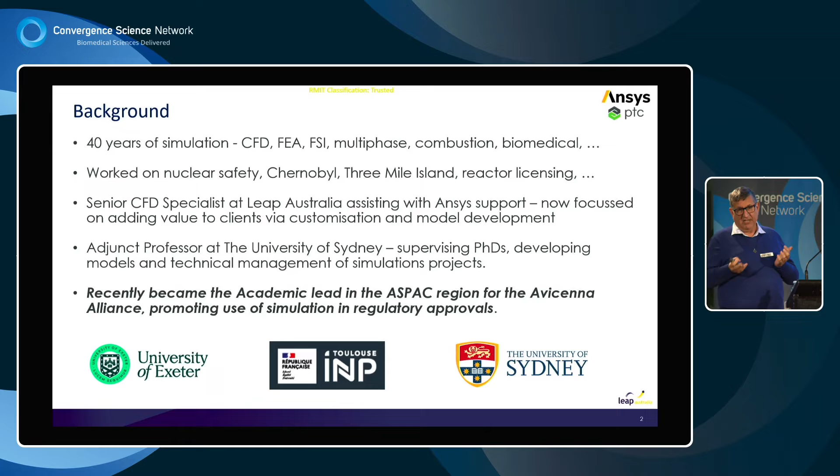I've been working with the LEAP team here for 20 plus years, doing simulation and supporting simulation. And I'm an adjunct professor at Sydney Uni in chemical engineering, where I have students, research projects, my own projects. So I'm actually very hands-on with software, and I think that's important. If you're going to be using this stuff, you need hands-on experience because you'll then realize the pros and cons of what you can do with software.

And recently, I've joined as an academic lead for ASPAC in the Avicenna Alliance. Their specific objective is connecting with regulators and helping make simulation more palatable to regulators by showing how it can be used to reduce development times, etc. And that's some of the things I want to talk about tonight.

So here's just a few examples of the types of simulation you might see. So when we talk about the medical industry, we've got to think about top left there. We've got tablet coating and tablet manufacture. We've got treatment of a cancer in a leg where we're using electromagnetic waves here, and so we need to be able to model things like that.

A drug being delivered to an eye and how it spreads, but that could be anywhere. A chromatography device being modeled to look at separation of chemicals, and then from that know what compounds are in them. And then deployment of a stent. I think this is one of the areas where everybody knows somebody who's had a stent put in, and how amazing that technology is. A small cut in an artery or a vein, slide a stent in, open it up, and re-establish the blood flow.

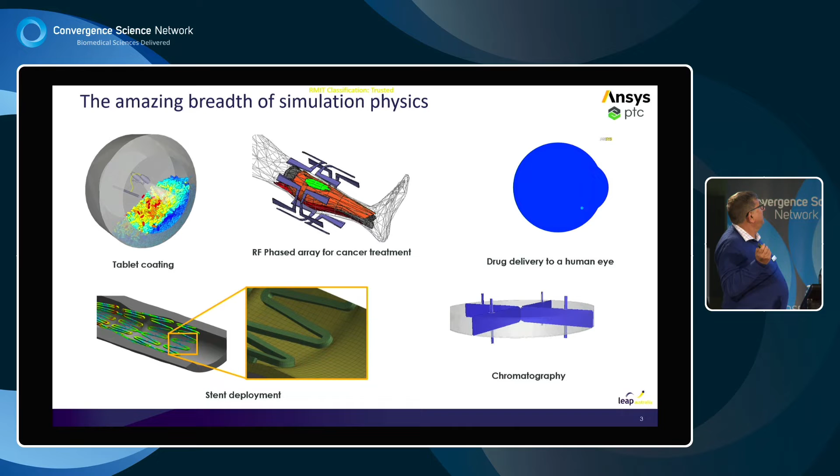Oops, I'll get the hang of this. So, what are we going to cover today? We are going to cover exactly why does healthcare need to innovate, and how is it going to do that, introduce digital twins, and what are some of the examples of how you construct models to go into digital twins.

So this example on the left-hand side may seem a little strange. Those are bioreactors. But if you think about it, most drugs have to be manufactured at large scale. Vitamin supplements, etc., need to be manufactured at large scale. And what you find is industry is very conservative, so they typically use mixing tanks and that. But this was a project where we looked at, okay, there's a much cheaper technology maybe in bubble columns that could help with manufacture. And so there's a very wide spectrum of simulation that goes into the healthcare and the biomedical industry.

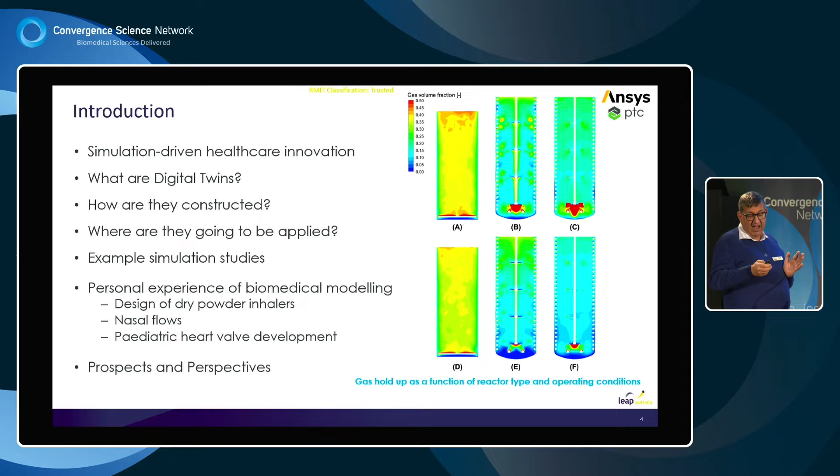What do we need to do? Why do we need some of this change of innovation? Well, if you look at the amount of money in healthcare, it's just rising dramatically. Procedures are getting more and more expensive. Equipment is becoming more expensive because you're able to get much more detailed scans. You can treat diseases and things that you couldn't treat a while back. So it's a very expensive industry.

Everything that's used in a medical industry has to be approved. And that approval can be very much sped up if you can use simulation. If you look in external industry, simulation is a core part of anything you do. It needs to progress much deeper and faster into the biomedical scene. And that will bring us back to some ideas around the quality.

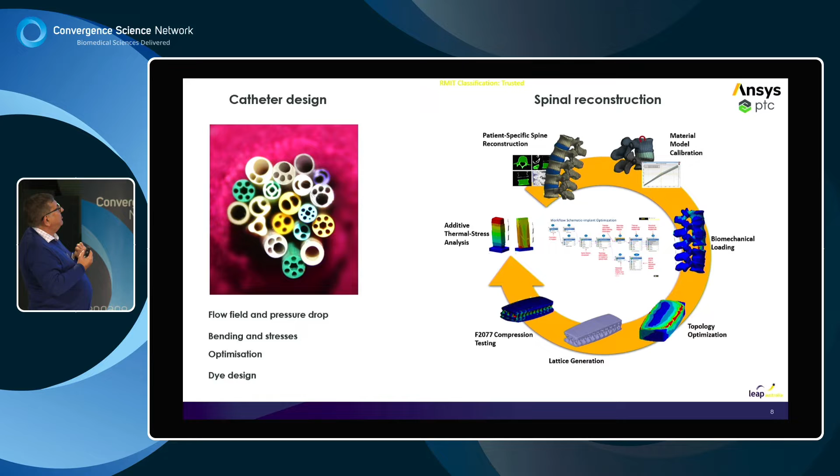Then you could do some topology optimization. Then you could say, okay, this is the topology I need, but let's make it a lattice so it's strong but doesn't have excessive weight and material. Now you've got to pass some standards, and F2077 is a compression testing standard that you have to pass, so you can do that in simulation. And then you can go and look at the manufacturing of that and what thermal stresses might do to it. And you've done all this simulation to make sure that the part you're going to insert has passed all sorts of tests and is as optimal as you can make it.

So, that's another part of simulation, is doing optimization, trying to make it as good as you can. Obviously, with a spine there, you can't just have a stack of spine parts and pick one off the shelf and put it in. These need to be customized.

So, every part of the healthcare process can benefit from digital modeling. So, drug manufacturing we've already talked about, drug delivery equipment, whether it be inhalers, whether it be pumps, whether it be sprays to the nose, implantable devices. So whether you implant a heart valve or some sort of orthopedic implant. And then also, there's a ton of equipment in hospitals that needs to be modeled and monitored.

And so, it's down through a whole load of different applications, from pharma to medical technology to in vitro testing, using simulation to design the best in vitro tests that you can and understanding what their limitations and strengths are.

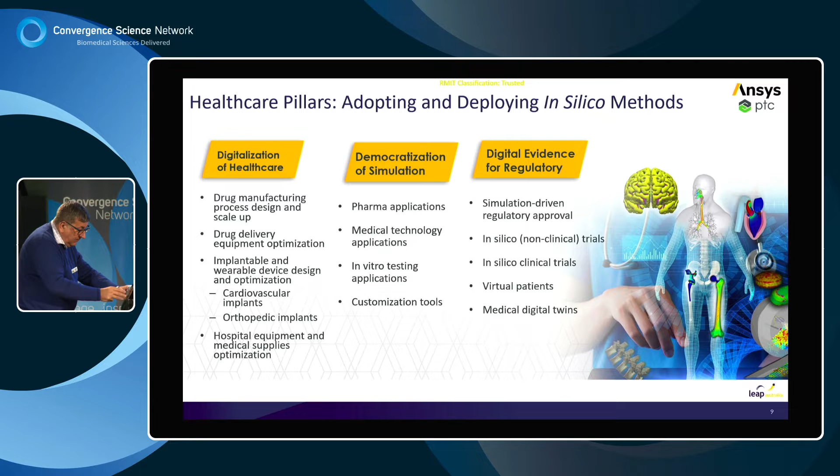I was involved with some work recently where there was a section of the gut with peristaltic flow, and somebody was making an apparatus to do that, and we could simulate that with fluid structure interaction and tell them a lot more about it, and we could tell them whether the material they were going to use would survive repeated use or not. So there's a big synergy. Just because somebody's doing experimental work doesn't mean they won't benefit from simulation.

And then there's getting towards the regulatory. So the US and Europe are moving very fast to have simulation evidence recognized for regulation.

Excuse me, it's hot in here.

That's something that Australia is starting to talk about, and people from Australia, from the TGA, are going out to these meetings, and it's going to happen here too. And so those of us doing simulation need to be in a position to provide the guidance and leadership that's needed there. And that's one of our things. I think the senior simulation people have got a huge obligation to bring on a generation of good simulation people to be able to take this task on.

So if we start with the process here, so if we start at 6 o'clock, we want to start some simulations. We have to manage the simulation, the data. We might then need to reduce that to a simple reduced order model, because some of the simulations might take days to run. Obviously, that's no use for making quick decisions, but you can capture that data in a reduced order model. You want to be able to employ those to help with regulatory compliance.

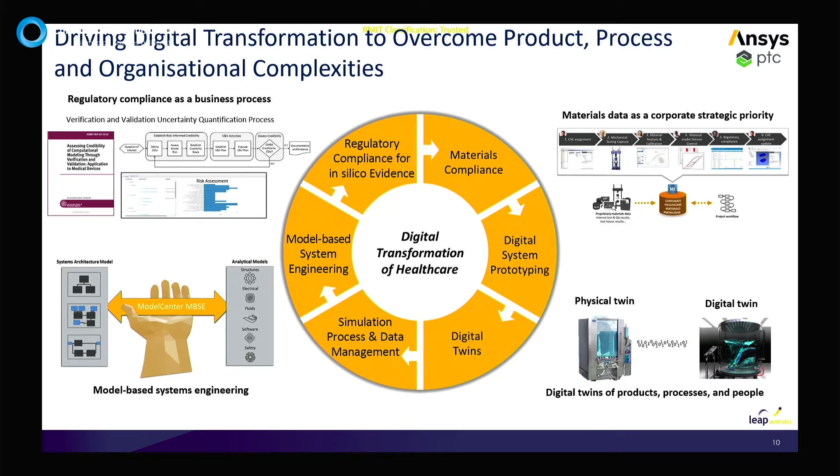So you might have, like here in the bottom right, a physical twin and a digital twin. So it might be some sort of reactor. It might be a computer model of that, and they're talking to each other. We definitely have to be able to go from very detailed simulations of structures, fluids, electromagnetics, to much simpler models that can be built into digital twins. You can't have a digital twin that runs a fluid structure interaction every time it wants to ask a question or answer a question, because it's just too costly.

And then there's this whole question of verification and validation. If we don't have verified, validated models, no regulatory organization is going to want to touch them. And nobody working in this area wants to be making decisions about somebody's health without having a proper, validated, verified model, and in all conscience believing they've done the very best to advise.

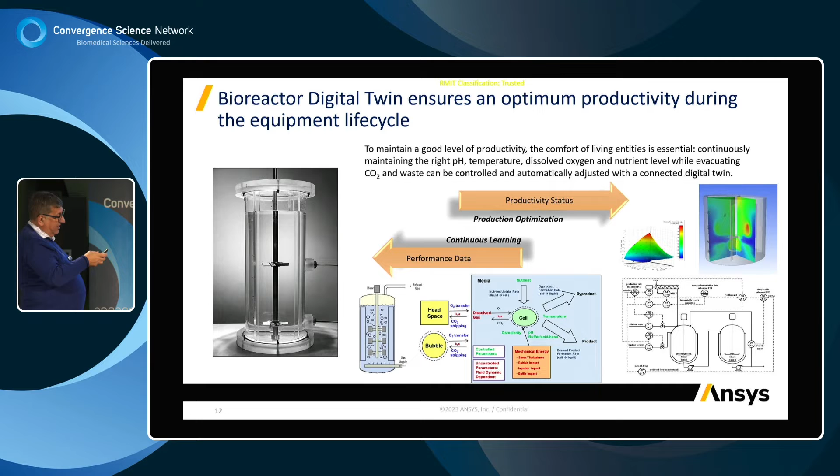And this way you can improve performance. So you don't have to improve the conditions in these by much to suddenly get a 5% yield improvement, say. And that's massive dollars, massive product enhancement. So having a properly controlled modeled system here can actually be hugely beneficial for productivity and the stability of the system.

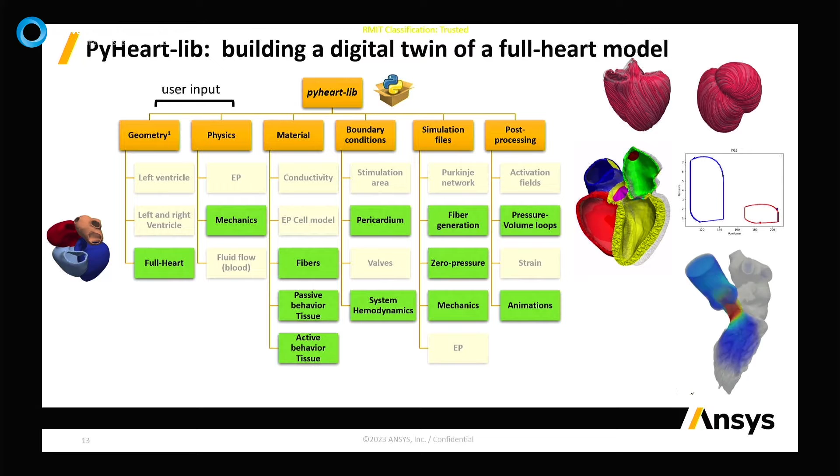So this is a project that's going on at ANSYS in Lyon, in France, which is mind-blowing. They are making a Python-based heart model where they want to include all the physics. So there's some green areas where there's good progress. There's some yellow areas where there's work still going on to do. But they want to have the flow, the mechanical behavior, the electrical behavior, a pacemaker there, and be able to model all of this stuff.

They now have a strategy for taking scan data and getting it to a geometry in about 20 minutes with very good techniques to clean scan data and extract geometry. So you can imagine that this type of tool is going to just get better and better with time and computing resources.

This is work from Oklahoma State University on entry into the lungs. So they've got computational fluid-particle dynamics, so small particles that you want to get to the lungs. You've got the motion of the lungs there. Now, you cannot model in any sort of simulation all the way down to the alveolar, because the number of kilometers, if you like, of tubing is going to be crazy if you do that.

So you might use detailed simulations, say down to generation 13, and then simple network models beyond that, and have a system that you can really make quantitative. So this is towards having a digital twin based on scans. You can obviously do scans of all the throat and the nasal there, with appropriate models.

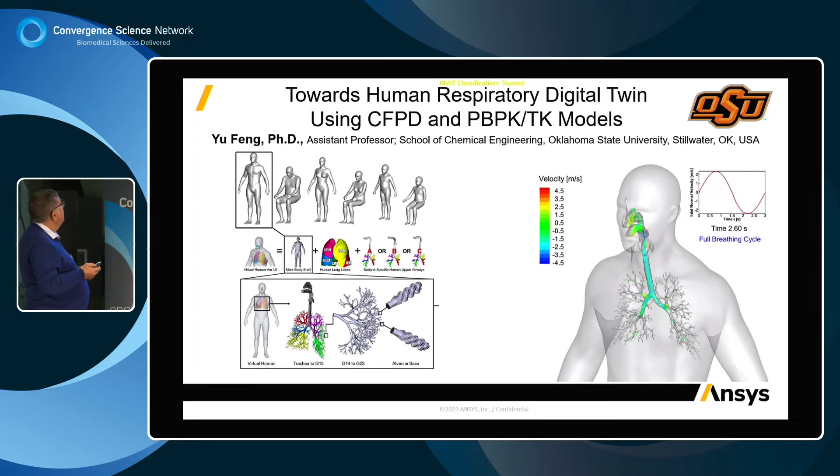So, this is the slide to hurt you all, to punish you for not being mathematicians like me. But there's a serious point to it.

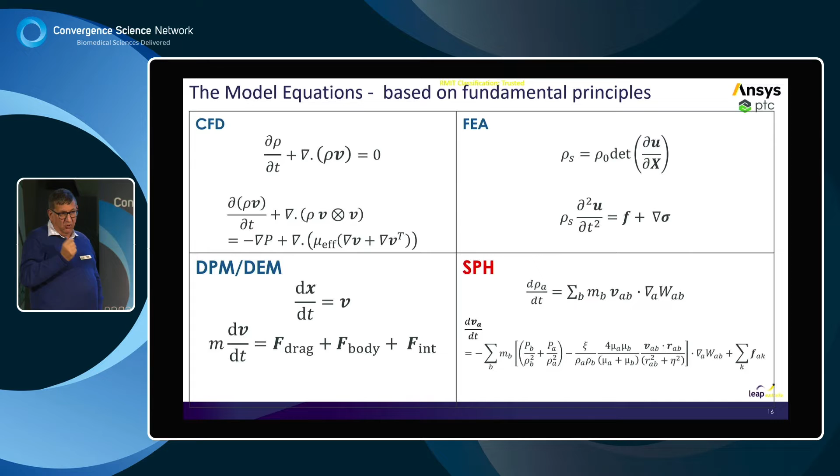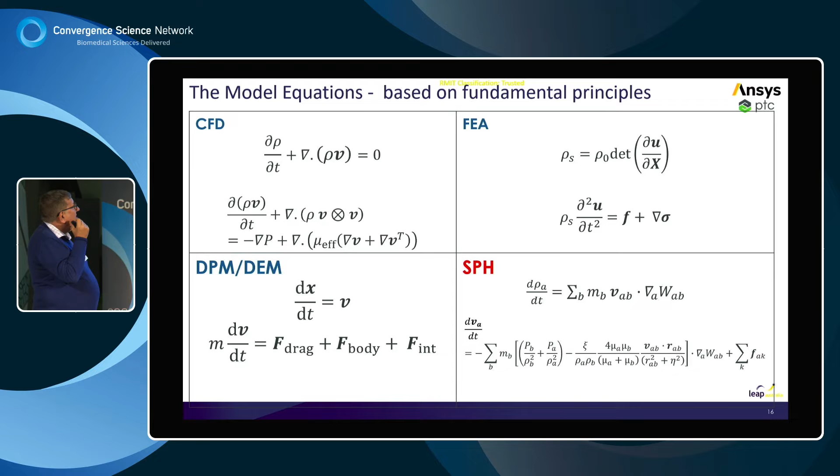So, digital twins are based on well-known physics. And so it's really important to understand, whether it be fluids, structures, particle motion, there are fundamental equations that are solved, which are laws that you can't meddle with. They are the law for doing that. And so, provided you solve them properly and you put in the right constitutive laws, you can actually be sure you're going to get out the right answer.

So obviously, if we take finite element analysis, if I put in the wrong material properties, I get the wrong answer. But the equations that I'm putting in are actually correct. So you kind of shift the burden to not having to prove the fundamental laws, but having to use them correctly.

And then there's one odd one out here, because I want you to be able to distinguish: some people do modeling with a process called smoothed particle hydrodynamics, where you treat a fluid like a collection of particles, and it can be a very efficient method. But what you've got to understand is that's not a fundamental law, that's an approximation. And so it's really, really important in modeling to understand what is true, what is an assumption, and what is a constitutive law that has to be used to close a model.

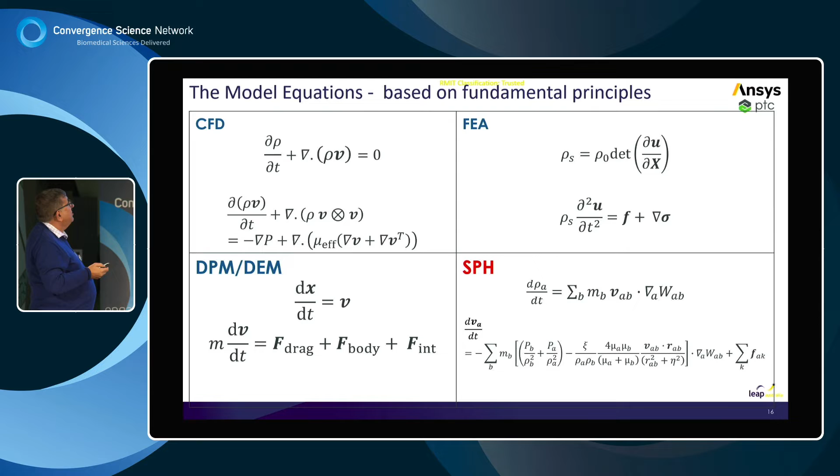So I was recently asked to write a review for the chemical process industry for its centennial there. And they asked me to specifically say, what's the future of simulation in computational fluid dynamics in this industry? And I wanted to do some key points here.

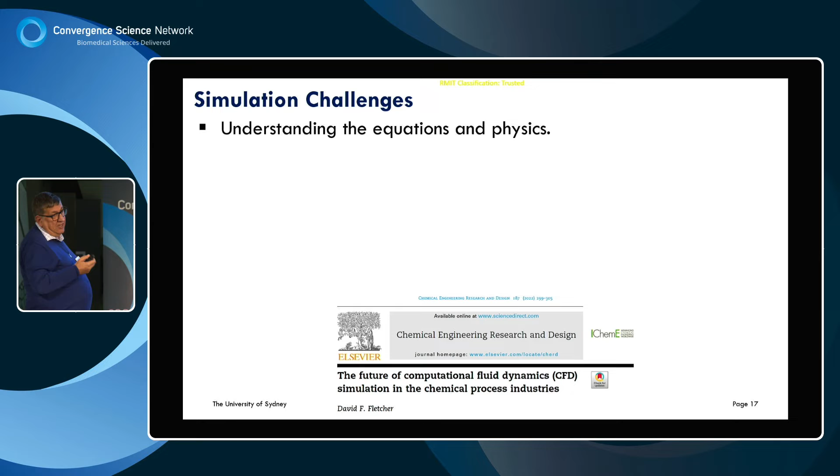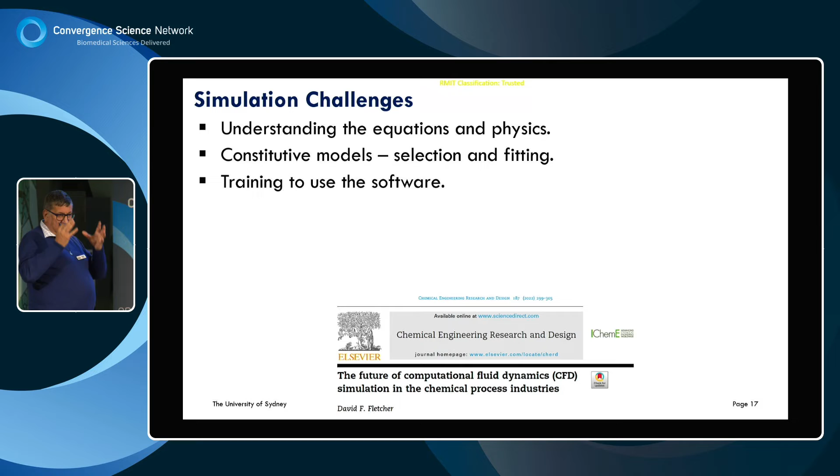If you're going to use software, you've got to be properly trained. You need to understand the basics. You also need to know how to use the tools. And when you've got a model, it's not good enough to just say, I've got pictures. You've got to validate and verify. So verify is to check maybe against analytic solutions, against common sense. Validation is to compare with experiment.

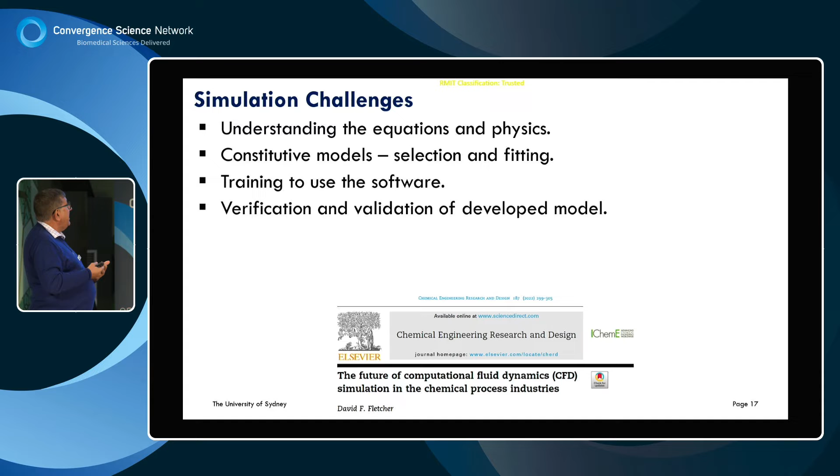And we have to keep in mind experiments aren't perfect either. When I see a simulation that goes through every dot of experimental data, I know it's made up, okay? Because you're never able to do that. It's really important that you keep these things in mind.

And I'm going to tell you that there were too few PhD-trained computational engineers out there. And that's just a fact. If you talk to people in industry, there are not enough people. There are loads of people who've done some simulation, but they're not computational engineers. They don't understand what their simulation is doing.

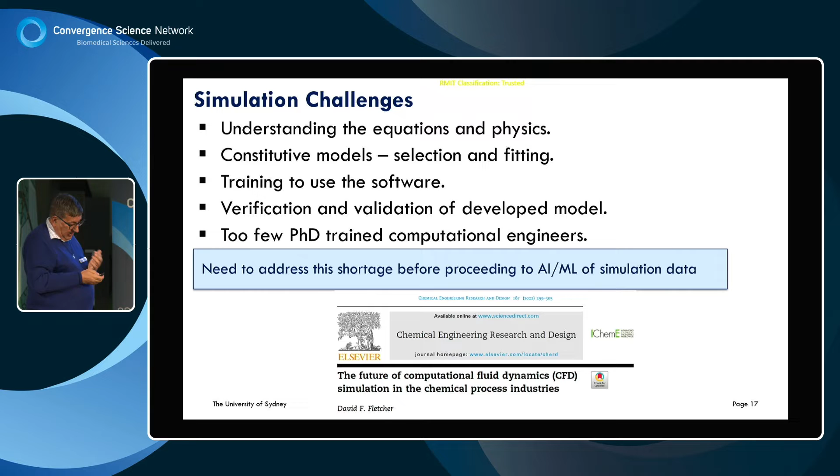And now we need to understand this as we go towards AI and machine learning. What are we going to cover up with that? So this shortage needs to be addressed, and those engineers also need to know how to interface with AI and machine learning. It's really important, I think, this point about what we need from our universities. I'm now going to give a few examples.

So this is some work done with the CSIRO here in Melbourne, and it's about stomach modelling. So I do need to just get a couple of these movies going. Now, I don't know whether I dare click. But let me talk about, maybe we'll just see this one. So this was a theoretical-like experiment where you put some oil in the stomach, you put some water on top, and you looked at how density inversion occurs in the stomach, and understanding how that interacts with the shape.

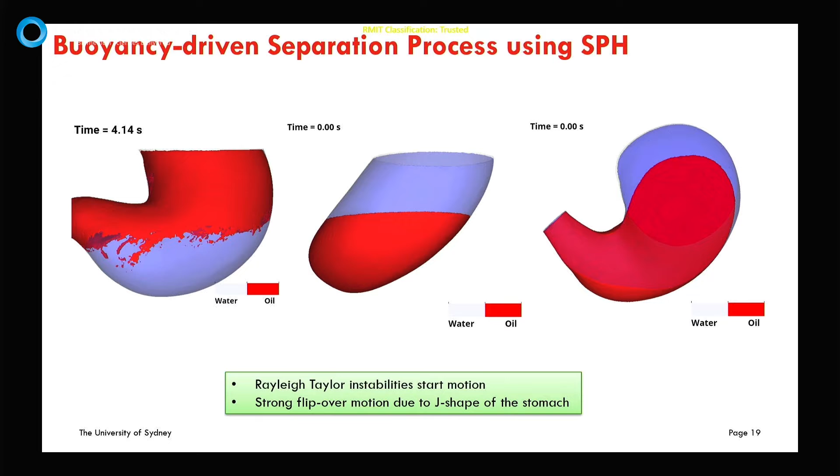Why do we care about these things? We care about it because of obesity and stomach problems. How is food in there and digested? But also, what happens when you put medications in the stomach? So this was like a bit of a starting job to look at that flow. And because you can do this process with a number of different techniques, it's a great validation because you can compare techniques. Now, I'm going to skip over those.

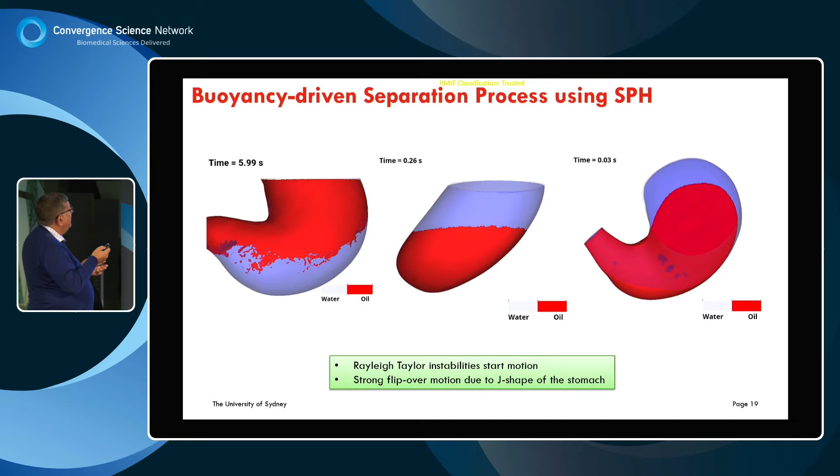Come on. I don't want to see them all. Yeah, so this is, let me go back one. Let me just go back and then forward again.

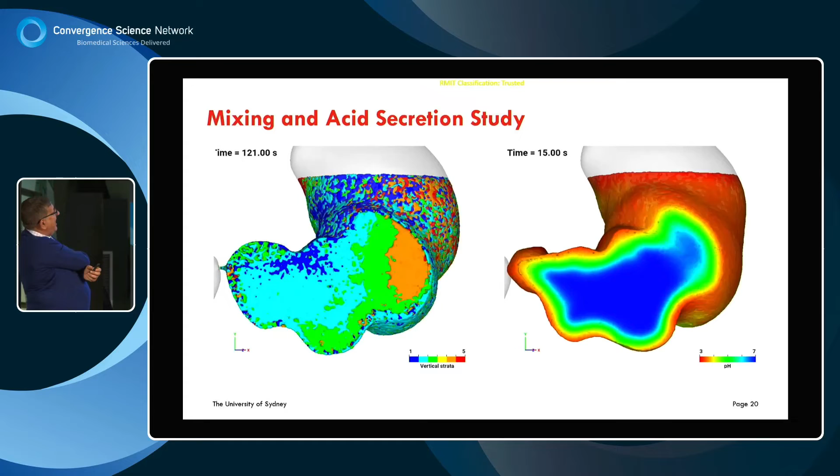So we started off with layers of coloured particles and looked at how they mix in the stomach when you've got the contraction waves. And then looked at how acid moves into the stomach. Now the question is, how important is that contraction wave? So let's go and have a look. Let's do a simulation with a static wall and with a moving wall.

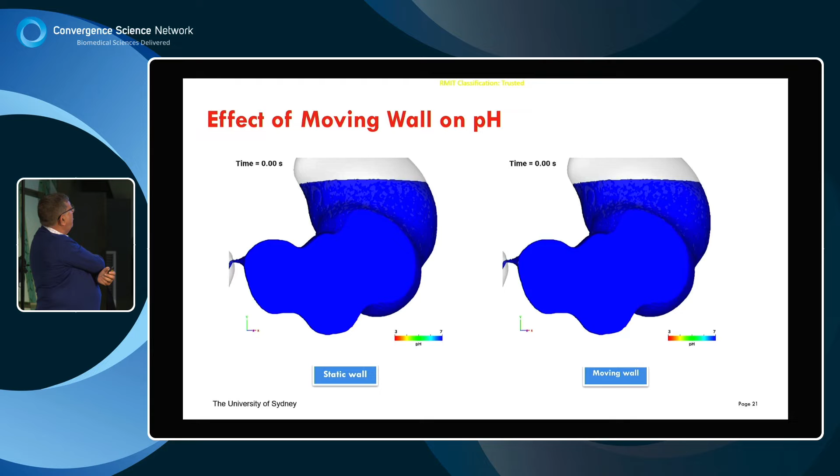So that's the other thing about simulations. You can do what-ifs. So if somebody's got a set of contraction waves that are abnormal, you can set up a simulation and start looking, how is their stomach functioning? How is the mixing going? How is the acid being introduced? So these are your steps that you need to build a digital twin.

I've got a couple of slides on inhalation devices.

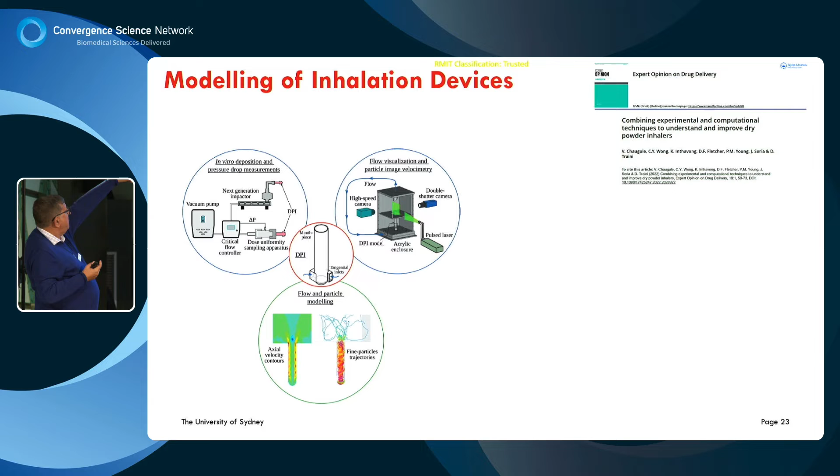Often your validation cannot be directly inside a device. So if you think of that lower part, like a test tube, that's inside an inhaler, which has got a couple of swirlers on it, you can't actually measure the flow in there with a laser sheet, but you can measure what comes out.

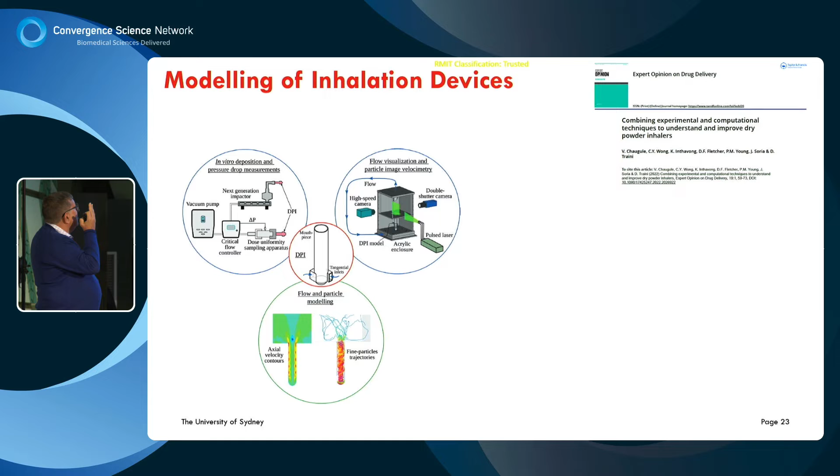So good quality experiment and simulation go hand in hand. Anybody who tells you experiment is redundant is completely wrong. You need high quality experiment to validate simulation, and then simulation can tell you what's going on inside. It's not a bad assumption that if you could predict the way the jet behaves outside, you've likely got it right inside. So that's kind of important.

A couple of bits of simulation with my colleague Kiao, who I work together with. This is just to say what you can do now in terms of looking at things like spray breakup, looking at the complex flow in the throat, and understanding where the flow is smooth, where it's turbulent. You can do very high-level simulations that can help you understand the components of anything you're making. So if you're making a spray, you can understand how it's going to break up into certain droplets and what the shape of the chamber is going to do to that.

Let's just check for time. How am I going? 6:39, that's good.

High quality simulation again is really important here, and that information can start to be used to form a digital twin. So our last major topic is around hearts, and this is a project I'm super passionate about. It's about developing a polymeric heart valve replacement for children.

The key thing here is if a child is born with a heart defect, they may have to have 5 valve replacements between being aged 3 to 23. Can you imagine your child having 5 lots of surgery, maybe 3 of that open heart, and every time, of course, there's a risk they'll die?

Why do they need that? Because the arteries are growing, and the valve has to be replaced because it doesn't grow with them. And of course, if the valve stops functioning, there's no oxygen, and that's catastrophic.

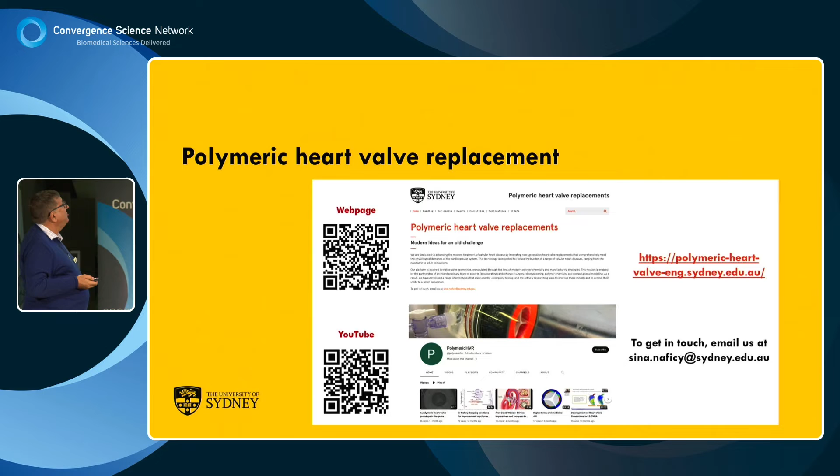So I'm working on a project where we've got a pretty strong team that we've put together here. I want to talk to you about some of the simulation work going into that. It's a very young team, the average age here is pretty low.

Key in this is the second person, Professor David Winlaw, who was the surgeon with the passion to do this. He came and sought out a couple of us, my colleague Fariba, because she was into biomaterials, and then very quickly they realized that simulation was going to be key, and that's how I got into it.

So we've built up this team. COVID hit just as we started all this project, so we kept the team together through COVID. One of the things I did was democratize simulation - get the experimentalists involved with simulation, even though they weren't going to do it themselves, but to see what we could do. The simulation team worked super hard and involved lots of people in simulations, so that when they went back to doing their work, they understood the sort of needs we've got.

Luke from Leap, a colleague from here, has been instrumental in working with us on this - give him a plug. So when you're getting into a project like this, you've got an end goal. You want a really detailed model of this valve, all the materials problems sorted, all the surface coating problems sorted, and everything. But you can't have that - you've got to go step by step.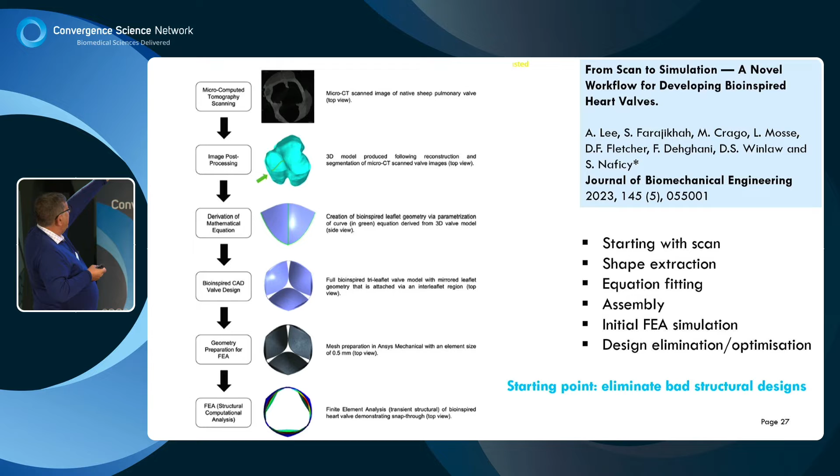Our first step was to take scans of, I think this was a sheep's valve, extract from it some of the essential geometry, fit a mathematical equation to it, build a valve, and do FEA. So take a typical pressure load on it. Can we open these properly? Can they snap through or not with the sorts of materials we want to use? That was the very first step.

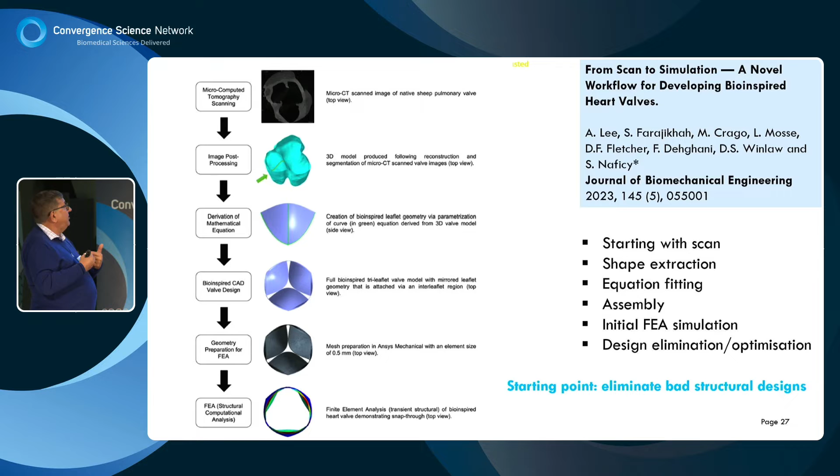So why do you do simple things first? Because you can throw out certain designs very quickly. It's like if you were designing some piece of equipment - get rid of the bad ideas very quickly, then only bring more sophisticated ideas onto good candidates.

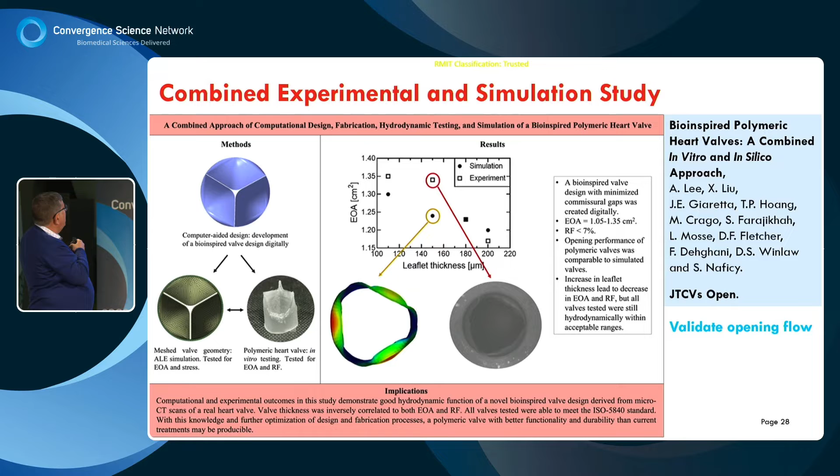So the next step was to start putting fluids in this. We've got a pulse duplicator, which allows us to measure the flow through and record it. You can see you start to get this effective orifice area when it's open. Those look quite different between the simulation and the measured, but actually it's the scale - there's 1.22 to 1.32. It's pretty damn close. So you start to be able to understand whether it's going to be fit for purpose. That second picture at the bottom shows you what the polymeric valve is that's going into here.

So there's a lot of materials that have gone into this, materials understanding, but we get to the point where a certain valve here can be opened, and then we can start looking at how well it opens.

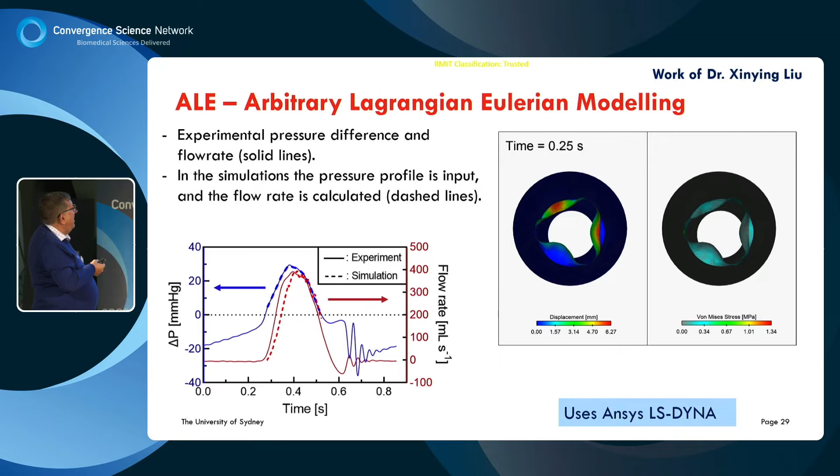So this was done by a process. When you've got data from a pulse duplicator, you get both pressure and mass flow, so you can use one of them to match the other. You can take the pressure, the blue, fit a dotted line through that part of the curve, and calculate the red that goes with the full brown line. This was just during the open phase, matching up the data and understanding what's going on.

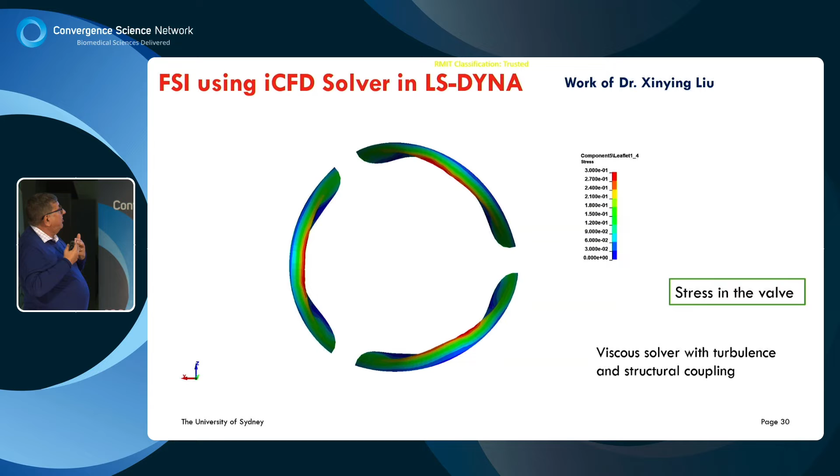Then you can go to a full coupled two-way flow and include a viscous solver, which means you capture the viscosity, the turbulence even, and couple it. Now you're looking into the valve, and that's what it's like when it comes together to close. You'd be surprised your valves don't close perfectly - they come in on each other. There's always a bit of reflux, about 5%.

And then you can start looking at the flow. The peak flowing through there is about 6 meters a second. You can see the process whereby as it closes, it shuts it off. And you can see how much the tube is deforming outside of this.

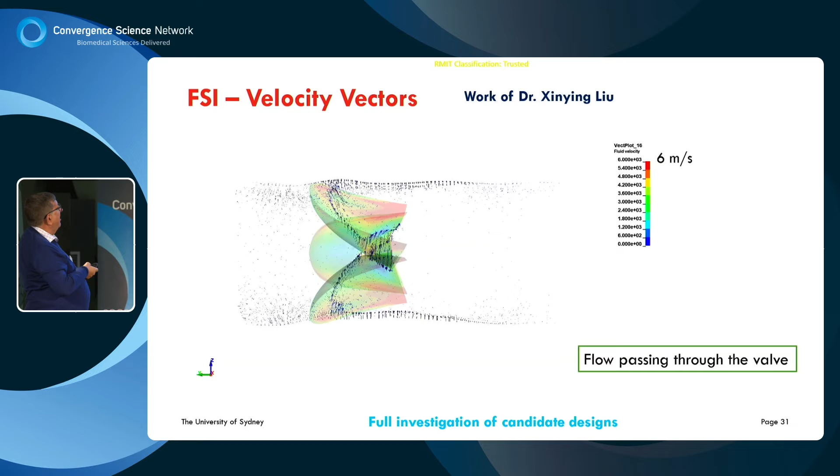So very quickly, you'll realize that a valve is not a valve on its own. It has to be fitted into something.

That brings you to this piece of work, where essentially we took lots of scans of children's ducts that you want to put the valve in. Often the valve sits next to the heart, but you can't replace it there directly - you want to put a valved conduit in. On the left of each of those pictures is a scanned conduit, and on the right is basically done a bit of optimization to remove kinks in that, to start to think about where would you put the valve in this. Because, again, you can't just test a valve in a perfect pulse duplicator with a straight tube when it's going to have to go into this tight duct, because you might start getting flow separations that you're not aware of.

So you've got to be able to move forward and use your models in these complex situations. And none of this is even close to making a digital twin here yet. But from the design process, you can see that this digital input is absolutely essential to understanding. If you just have experimental data, you have an outcome from an experiment, but it's very hard to answer why - why did that happen?

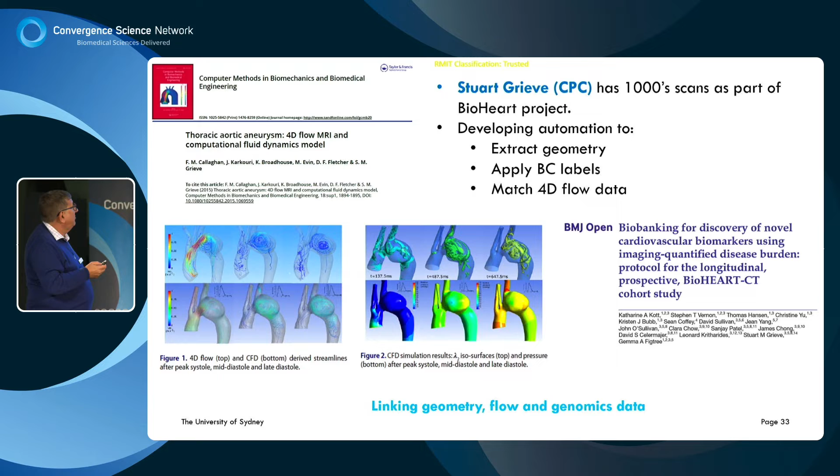So that brings me, I hope, to good timing towards the end. Simulations will have to become more prevalent. They've had to become more prevalent in industry to keep it competitive. They'll have to become more used here to design processes and equipment, whether this be a CPAP machine to help with breathing, a process to make a drug, or an implant. You've got to have simulation.

With simulation, immediately comes the option to do some automation. You can do by-eye optimization, where if I tweak this corner it'll be a bit better. But now you can do a lot of automated work. You can have automated geometry updates where you use things called adjoints to move the geometry for you and see what will give you the lowest pressure drop and the smoothest flow.

Then you'll start to develop digital twins, where you bring patient measurements and simulation results together. Typically simulations are long-running, so you make yourself a simpler reduced order model with AI. You've got data coming from the person, and they're confronting each other, so you understand whether things are working normally or whether we've gone off the normal spectrum, in which case, what might be happening.

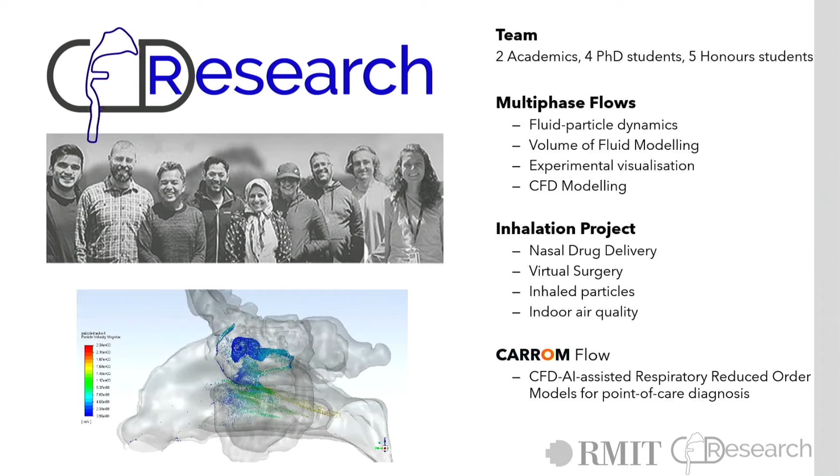This is an example of a particle flowing through our nasal cavity. If you've never seen inside your nose before, this is what it looks like - it's quite complicated. All those curves are your sinuses, your paranasal sinuses, and a lot of the time these are the points or regions that cause a lot of pain amongst patients. If you know people who have suffered chronic nasal obstruction, it's quite debilitating - breathing is dysfunctional, and you get a lot of problems related to that.

So when a patient presents to clinic, they firstly do subjective tests, which are like a survey, asking how do you feel, how's your congestion, where's the pain, and you give them a scale of 1 to 5. They can also do objective tests, which involve rhinometry - they send some signal waves down your nose, and they can determine where the blockage is as the sound waves bounce back.

And then they can also do CT scans or medical imaging. From that information, the ENT specialist, the ear, nose, throat doctor, gives you a diagnosis. And they have 2 options. They give you medical therapy, which is probably the most preferred option for most people. So that's nasal sprays or a nasal irrigation.

In severe cases, they may say, hey, you've probably got to go for surgery. And if you think about how sensitive our noses are, and think about these machines going to your nose and cutting out some bone, it's quite yucky, right? So this is not the preferred option, but unfortunately, if the cases can't be resolved, this is what happens.

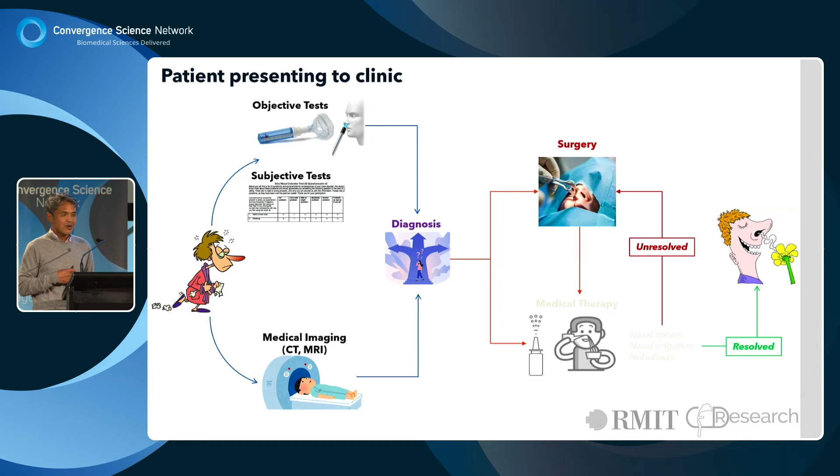And after surgery, they need to get post-treatment, and typically post-treatment will involve some kind of nasal irrigation to flush out all the mucus or the blood remains that are in there. Hopefully, that solves your problem. However, in many cases, patients go back for a second round of surgery when both medical therapy and surgery fails. And this is what we want to avoid. And so what's the causes of these?

If I take these words from my colleagues who are surgeons, a surgeon's interpretation of those tests, objective, subjective tests and CT scans, are typically their opinion. It's a subjective opinion. There's variability amongst each surgeon. And there's no real way to scientifically and robustly give them a diagnosis. So what if we can include some simulation data and bump it in there before they make their diagnosis and provide them with some informed decisions?

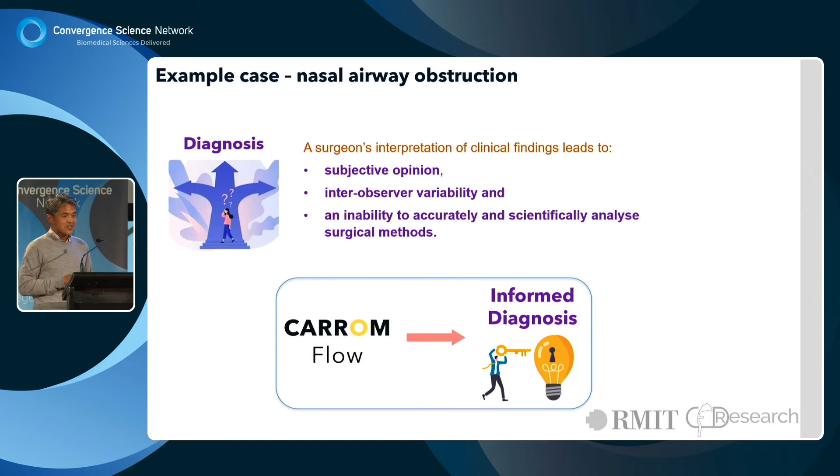Okay, if we can do that, then this section here is where our study will move into, this CARROM Flow. Our simulation data will move in, allowing the surgeons to have an informed choice and then provide much better surgery planning and also medical treatment, and hopefully mitigate the second round of surgery.

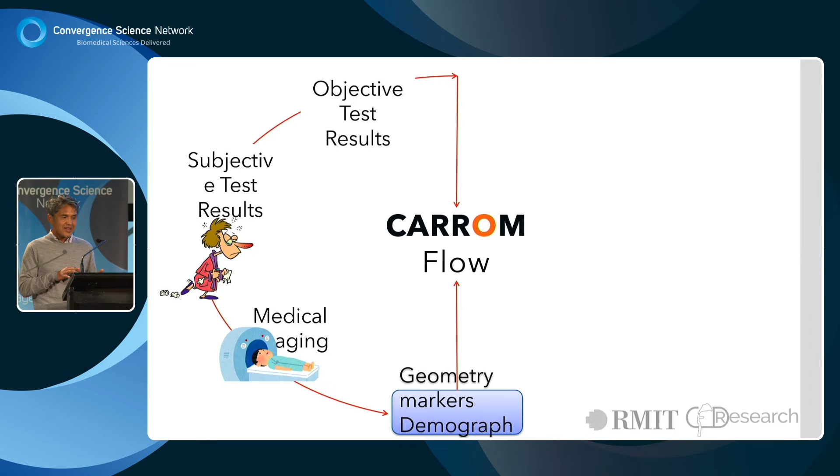And so what are the main data points or information that we require to establish this CARROM Flow? From the CT scanning or medical imaging, we can get geometry markers. So we can identify certain shapes and certain locations, cross-sectional areas, perimeters of the nasal airway. And we combine that with demographics of the patient and also the objective test results and subjective test results.

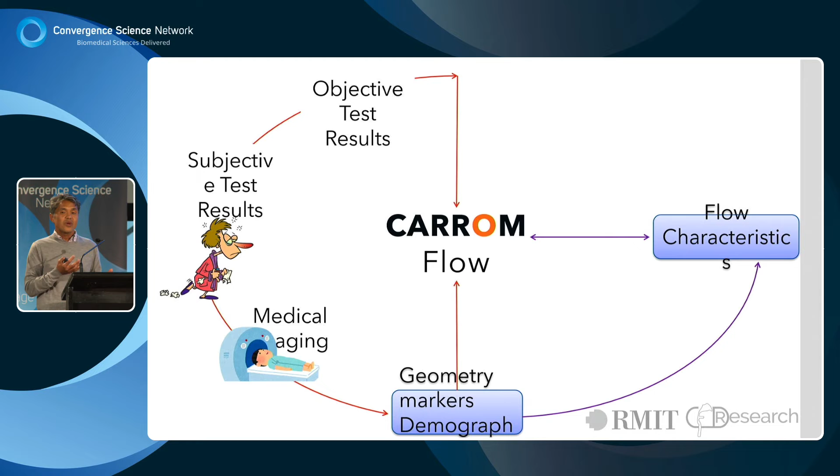We then include some computational fluid dynamics flow simulations that give us the detailed data that we need. That gives us the pressure drop that we want, or we can identify where the largest obstruction area is, and then we can actually inform the surgeons, hey, let's do the surgery in this part or in this region.

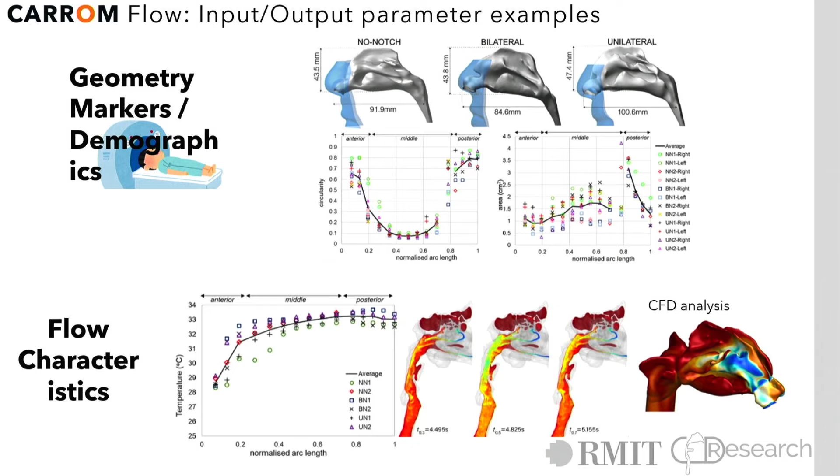Oh, the text is a bit funny, but okay, so what are some of these typical demographic markers? So there is this theory that depending where you're located geographically, our noses have evolved over time to adapt to climatic changes. So here are some different shapes or different morphologies. We've got one where there's no notch, so at the front you've actually got a straight curve. In the middle, we've got a bilateral where you've got a notch, like a little indentation on both sides. And a unilateral, you've got one on one side of the nasal cavity.

We extract all this data from our CT scans and our 3D CAD model that we produce. We've got these markers called the circularity. If we take a cross-sectional shape across the nasal cavity, we can determine where it becomes more spherical or less spherical. And we can also find out where the cross-sectional area starts to minimize or starts to increase. Some flow characteristics that we can find include the temperature contours, the surface heat flux, and the temperature distribution.

So at some point in your nasal cavity, let me go back. The nasal cavity is an unbelievable heat exchanger. By the time we breathe the cold air in our surroundings of about 12 degrees, by the time it hits the back of the throat, it's almost 30 degrees. We know this from our simulations and from experiments, and so our simulations tell us that if you've got a geometry that's not ideal for this, it will give us a warning signal to say, hey, this nasal cavity, there's something wrong here. It's not giving you the right heat flux or the right heat exchange.

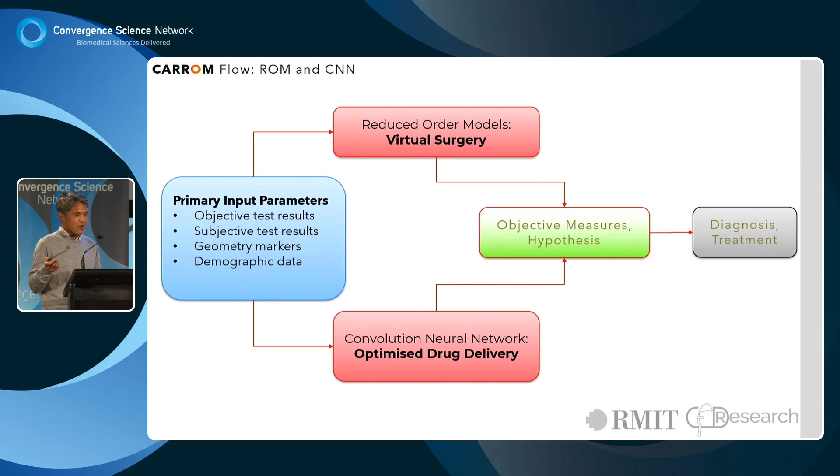We need to also establish objective measures and also some hypotheses, and then that will guide us for our appropriate diagnosis and treatment. I'm just going to skim through this part, which is the reduced order model and the steps that we're taking to get there, and also with the neural network in the next slide.

So we're going to classify each person's nasal cavity, and that will establish our different reduced order models. We then set up the training data, and this is the part where it's going to be most time consuming to create the correct data that we need. And these will be used as our data sampling input parameters. We can then generate the surface response curves to have a look at the parameter and the input-output response. And then we can generate the best ROM for use.

Okay, so when we look at what input we need for the ROM data, this is the workflow that we want to establish. A patient comes in, they get their scan. We make an experimental model, which is a 3D printed airway model, and a computation model concurrently. We do a CFD simulation analysis.

Our ENT surgeon performs the surgical maneuver or the surgical treatment. We do the exact same thing in the virtual space. The patient then goes back for a secondary scan, and then we compare the results of the patient pre-surgery and post-surgery in both in vivo and in vitro.

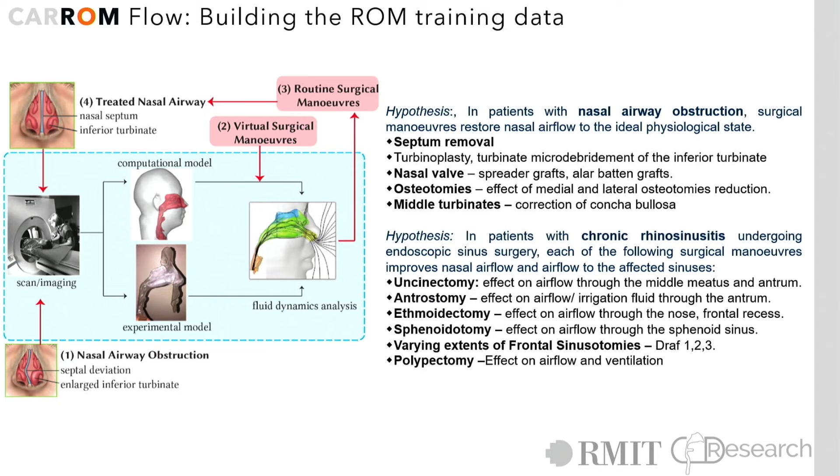Nasal valve, where they open that region up, and osteotomy and middle turbinate, where they remove part of the bony structure. I'll just leave these: uncinectomy, antrostomy, ethmoidectomy, sphenoidotomy, polypectomy. So the surgeon has a lot of choice, and it's difficult for, I won't say unskilled, but difficult for junior surgeons to make the right decisions, or those that are confronted with unusual, atypical cases.

So we've talked with the surgeons, and they do want to be able to quantify these decisions that they make. Okay, so the second part of the project is to have a look at the input data now so that we can apply the correct medical therapy for the patients. So now we take the patient geometry markers, again, their objective and subjective test results, demographic data, and we can also look at the nasal spray device and also the nasal irrigation device, and there was also the nebulizer device as well.

So this is the workflow that we've got. You start off with the medical imaging scan, the image segmentation step, which extracts the airway from the scans and converts it into a 3D model. This is a really important part of the project. When I first did this in 2005, when I started my PhD, my first model took 6 months to create, from CT scan to CAD model to simulation.

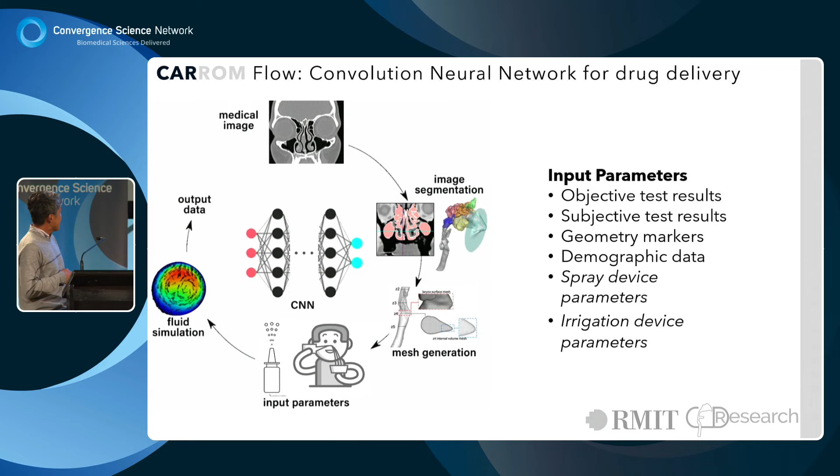So this first stage here is really exciting because now we can look at lots and lots of data. We can look at thousands of different models. The input parameters, well, I'll talk about that next, and then you can get the simulation data, and that will give us our output.

We did a pre-machine learning, pre-AI study in 2020. Instead, we just used a simple correlation matrix to look at different parameters that influence deposition. We applied it onto 2 types of surgical procedures. And we've got here the darker, larger circle gives you your correlation. So the full red gives you a positive correlation, and the full blue circle gives you a negative, but also strong correlation, which are the Pearson's correlations.

So we can tell that, okay, these are our, you probably can't see that in the audience, but these are the regions: sphenoid sinus, nasopharynx, maxillary sinus, frontal sinus. And where we have a large circle, such as this red circle, we look down, and it tells us that, okay, if we've got a lot of sinus deposition, then that deposition is primarily caused by the ethmoid deposition. So correlation matrices are really fascinating to provide rapid analysis for multi-parameters that we want to investigate.

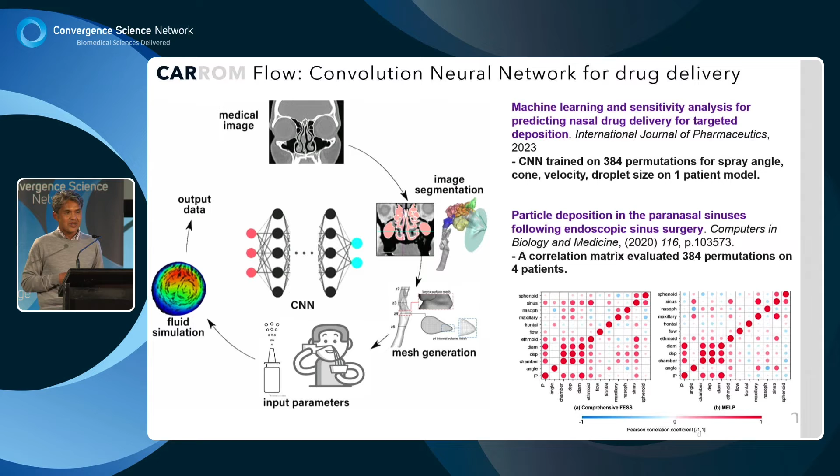Recently then, we advanced this work using a very similar number of permutations. We trained the same permutation on the spray, and it was also then able to predict the most sensitive parameters for us. So these 2 studies are quite related and linked together.

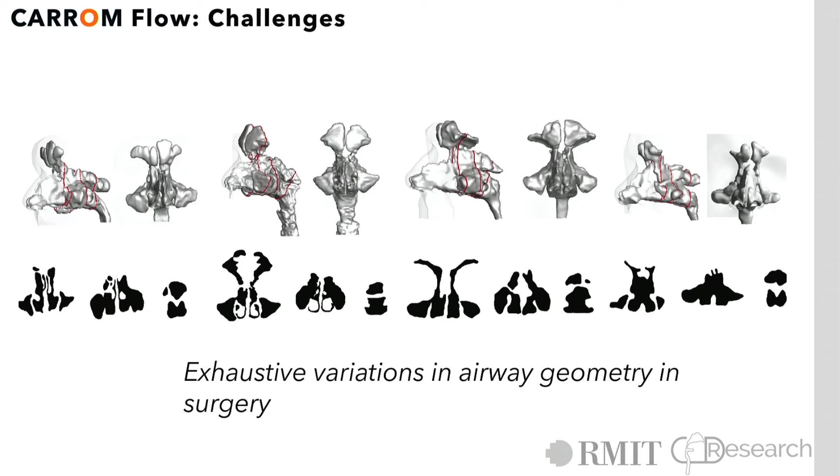Okay, so what are the challenges to establish our data, our training set? There are an exhaustive amount of variations in your nasal cavity. You look at your nose, you look at someone else's nose, and they're so different from size, length, height, and width. Now, these nasal cavities are ones that have undergone surgery, and I want to again demonstrate how varied surgery can be as well. If you see a white space between the left and right, that's because there's a septum, the bone. So black means airway, white regions are bone, and these kind of wings, these regions outside are called your maxillary sinuses, and they just sit under your cheeks right here.

Okay. What happens is you experience sinus pain. You want to take drugs to get in there to relieve that pain, to relieve the congestion, or at worst case, some kind of bacterial virus in there. But you can't get the drugs in there because the sinuses are sitting laterally, connected by a very thin tubing called the ostium. So when it becomes unbearable, surgeons come in with their little drill and start drilling the bone out, which is not a very nice thought. But you can see that here, it starts to open up, okay? This one has been drilled out quite a lot, you can see here. And so a lot of our work is to determine and evaluate whether these surgical procedures are efficient or effective.

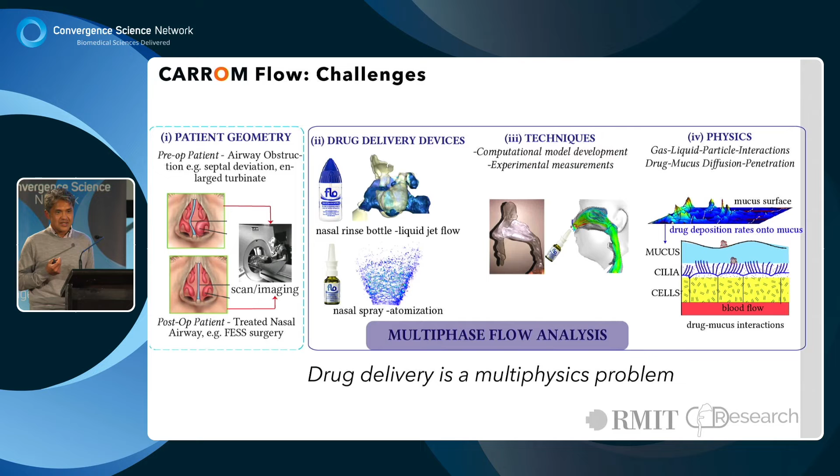A second challenge is that drug delivery is multiphysics. So it's not a matter of just looking at particles that deposit and then that's the end of the simulation. We've got breakup, we've got mucus surface that moves, and then we've got penetration through the mucus, and then we've got chemical reaction of the drug compound diffusing through the mucus, and that diffusion rate into the mucus is a rate against the mucociliary clearance, which is your defense mechanism of removing foreign particles. Okay, so anything that gets trapped in your mucus is getting flushed away by your mucociliary clearance mechanism. And so your drugs need to penetrate quickly, otherwise it gets cleared out.

Drug delivery devices are aerosols and they're very small, and we have to characterize this aerosol behavior because they become input parameters. Okay, so very challenging because we're looking at micron scales and at times moving at 10 to 20 meters per second.

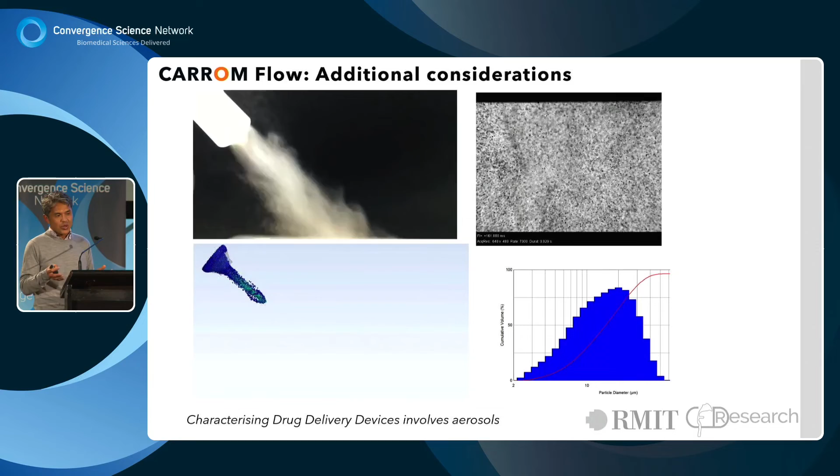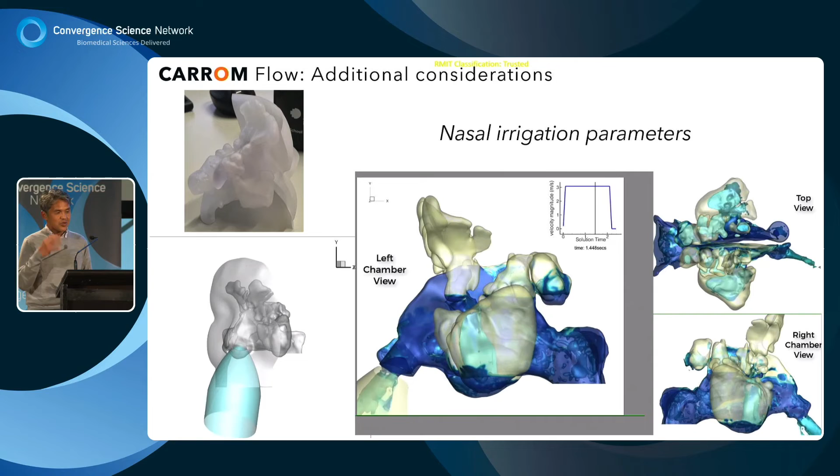This is an example of the nasal irrigation bottle that we were looking at, and this is also a multi-physics approach. So here we're looking at the different types of squeeze mechanisms and angles to try and enhance the saline liquid formulation to enter the different regions of the sinuses. So this was a fun project to work on. Investigating the bottle design, and the company are releasing a larger bottle. So you might see that out on the shelves soon, where they used to have a typical bottle, but soon you'll see a larger version of that bottle, and that's from this work.

Okay, so where does this take us? We've also got the full integrated airway from the nostril region, oral cavity to the lungs. We can extend this project to include the entire airway, and also when we shift from steady state simulation into full breathing cycle. So steady state simulation is just one flow rate, can be done in about 20 minutes. When we move into full breathing cycle, over 4 seconds, when you're looking at time steps of about 0.001, you're looking at almost 10, 20,000 time steps of simulation. So the workload increases and scales by a significant amount.

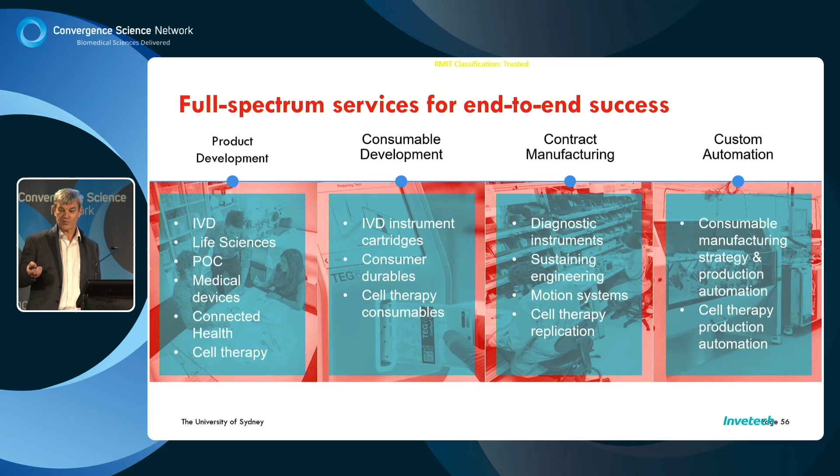I was going to say, by the way, as we go through this, Professor Fletcher and I have not collaborated on our presentations at all. Oh, that's a new font.

All right. My personal background is I left Monash. I went into the CSIRO for a limited period of time doing heat and mass transfer, and straight away I was into simulations. After that, I went for a bit of a tour. I call it an unintentional joining of the wind turbine industry because I was working as a chef in a pub in Cornwall. So I don't think a careers director would necessarily send you there. That took me around the world a little bit.

And in particular, it pulled me over to California where that machine was designed from a blank piece of paper in 9 months, and that was standing in Texas. So part of that accelerated design process was all through simulations, particularly from a gentleman who was the head aerodynamicist who built a model of that entire machine, not just the blades. He built the gearbox, the control system, the tower,

all the way into the business model so that we could predict if you put that machine up at a particular elevation, 2,000 metres above sea level, and had a particular wind flow, what its return on your investment would be. So simulation doesn't necessarily stick with the actual product. It can go into the business world and present you with data to sell your case, basically.

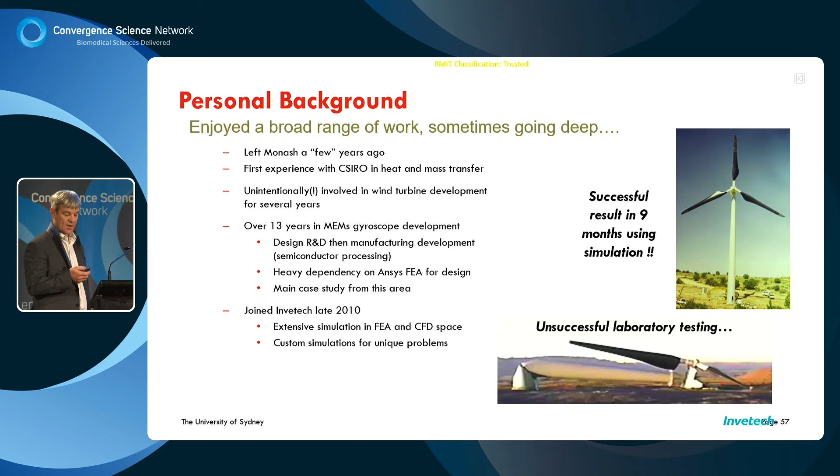From that business, they went bust, believe it or not, in a set of bad years in the mid-90s, and I went into MEMS, where again, heavily into simulation of devices, and I've got a case study from that. Came back to Australia in 2010 and have been at Invetech since. So that's a successful simulation result, and I always like to put up a good experimental result for you. That's a bad experimental result. That is serious. That is in Texas after 170-mile-an-hour winds went through that wind farm.

So what can you simulate? We mentioned a what-if scenario. I think that's the way I like to use simulation the most. To answer a number of what-if scenarios is where its most power is. What can you simulate? I've been impressed at the continued speed of computers. It's more a case of what you can't simulate these days, and as far as I'm concerned, if you can't simulate it today, you only need to wait a couple of years. Moore's law will help you out there. And I've got some reasonable examples.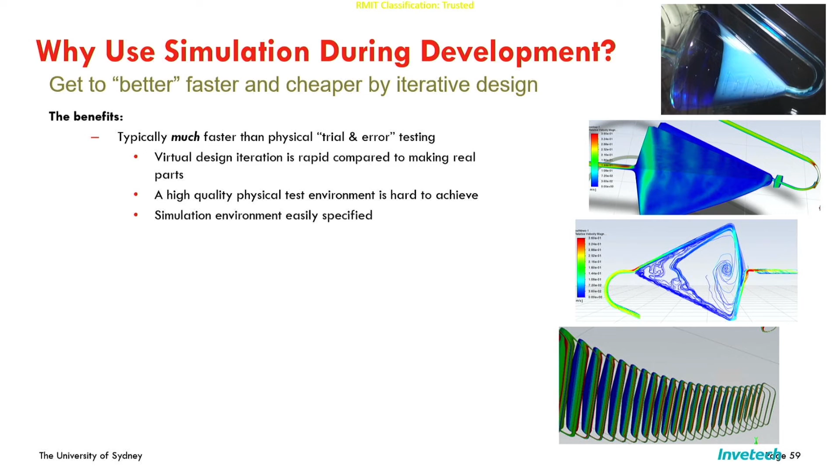For example, that unit up in the very top right corner there, that is a moulded component, and it's used for processing some cell therapies. It would take probably 6 months to change that chamber and find out a new flow regime. We can do that in a day in the virtual space.

You can get to information that you really can't measure. Again, this was touched on earlier. As you can see, particularly with the bottom one there, we've just sliced the daylights out of it to tell us what the velocity is as fluid progresses through that system.

We couldn't measure that, and if I can additionally add, the device up the top is a counterflow centrifuge. That's spinning at over 2,500 RPM. So how do you measure something on a spinning platform like that? Right? Simply, you really can't do it. The best we can do is take photographs, strobe photographs, of which that top one is.

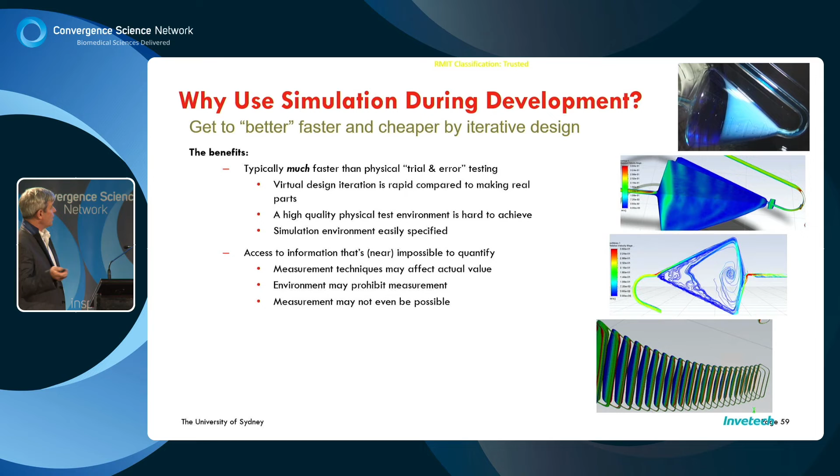Let's see if I can go over there. It can expand your understanding of actually what's going on in terms of the physics. Again, it's been covered. You really need to understand the physics of what you're working with in order to get the most out of simulation.

And finally, right down the bottom, quite often we can use that to model processes and then put that process into automated equipment or processing equipment. I've got a couple of examples on that. So you don't necessarily use simulation data to improve your design. You may actually go on and use that to develop your manufacturing processes.

What have I got? Yes. So these are old things. If you're going to use simulation, you do need to know your tools, right? And again, you can get lots of nice coloured pictures out of it. You can get nice videos. But if you don't actually have an understanding of what that's telling you or whether that's realistic, it can be quite damaging. You need to have good inputs, right? It's garbage in equals garbage out with simulation.

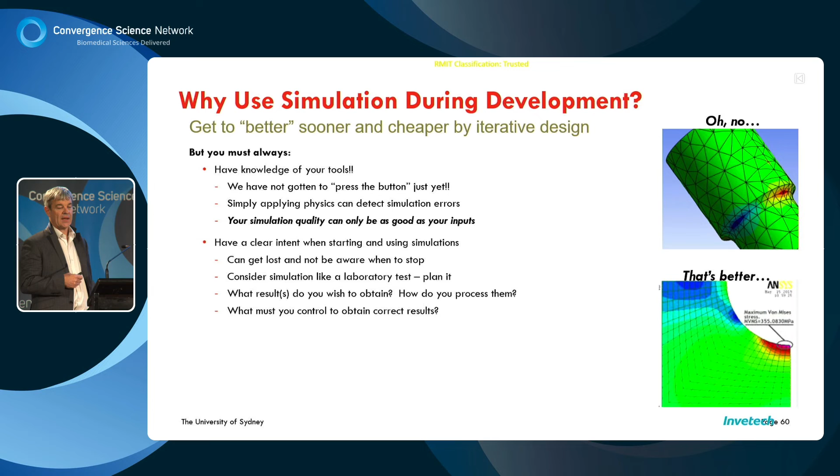When you're running these analyses, it's always good to have an endpoint. What are you trying to achieve or understand about it? And know that before you set your simulation up. Otherwise, you might have to go back and rerun all your simulations looking for other data outputs that you didn't collect the first time through.

And finally, and this was touched on again, you always need to be able to back your simulation up with experimental data or known cases that you can run to confirm that your simulation is giving you the correct answers. And it's incredibly important to do that if you're breaking new ground.

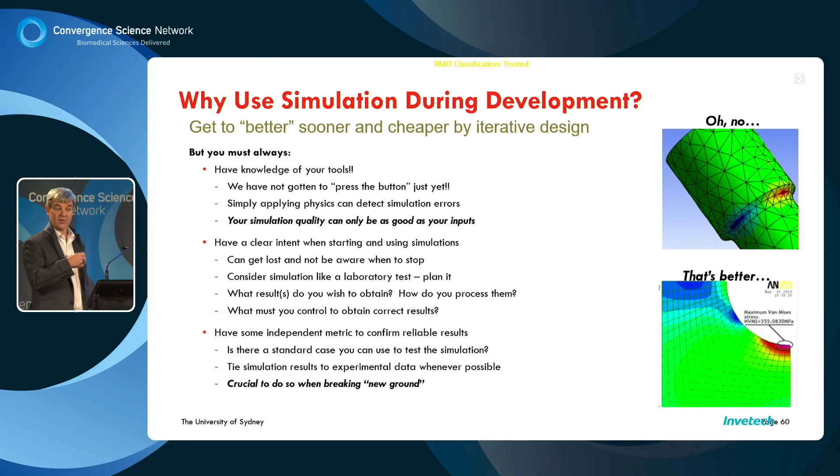If you haven't done these simulations before, or maybe you are really cutting new ground, you need to be able to tie that back, and it is a loop. Simulation, some experimental backup, and once you can believe your simulation, then you can get on with it and really improve things quickly.

So there's a case study here. This is very old, but the good thing about this is it's not protected by any IP, so I can discuss this at will. This is the MEMS sensor that was designed when I was in California. I call it a next generation device. That device usually took at least about 4 months to change. You had to go out and get new photolithography masks, you had to put it through the manufacturing line, you had to get the sensors mounted, and then you had to go off and get them tested.

The aerospace device was at Rev Y, so that's how many revisions they went through in order to get the device to the final point. The automotive device at the time that it went to production was at K. We basically started a new type of simulation, full piezoelectric, which gave us a lot more information. We got it into production at Rev D, and that included one mask set that had 2 revisions in the one thing, and the whole purpose of the A/B was merely to prove that the simulation was correct.

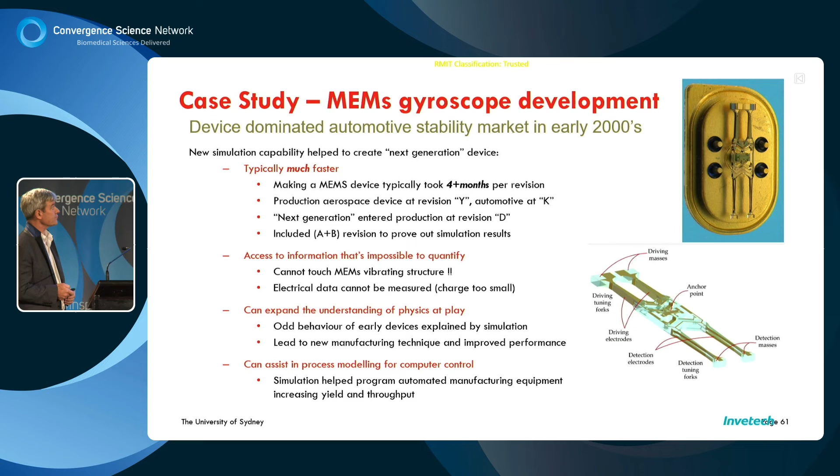At Invetech, I'm somewhat limited in what I can discuss about what we do, but we'll go through a few things. Computational fluid dynamics is a big subject for us these days. We use it for simple things like heat transfer out of cooling fins to far more complicated things like the counterflow centrifuge I just showed. It's certainly expanded a lot in the last 10 years of my professional career, and it's becoming more dominant.

I didn't actually mention something - I'll come to it later. Piezoelectric and thermoelectric devices are pretty standard for us. Peltier devices in particular, which are used to heat and cool, we model those a lot. I'll comment on that later.

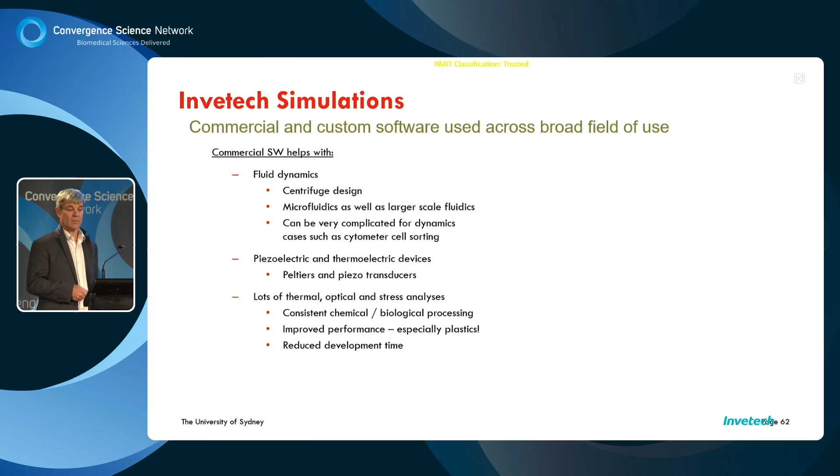Lots of standard analyses, mostly intended on getting your product to market faster, making sure parts come off and work properly the first time. And finally, plastics injection molding - we always do this on plastic parts these days if you're going to injection mold them, because the cost of having to fix the mold is fairly high, and it blows the schedule out.

We also cover a few more custom simulation areas. That includes the robot scheduler I've already shown - we use that to optimize our machine architecture before we actually start designing in earnest. We've modeled those Peltiers to the point where we've now got a custom thermal control module which is extremely quick. Luckily, I don't have to say what PCR is anymore - everybody's fully aware of what that is.

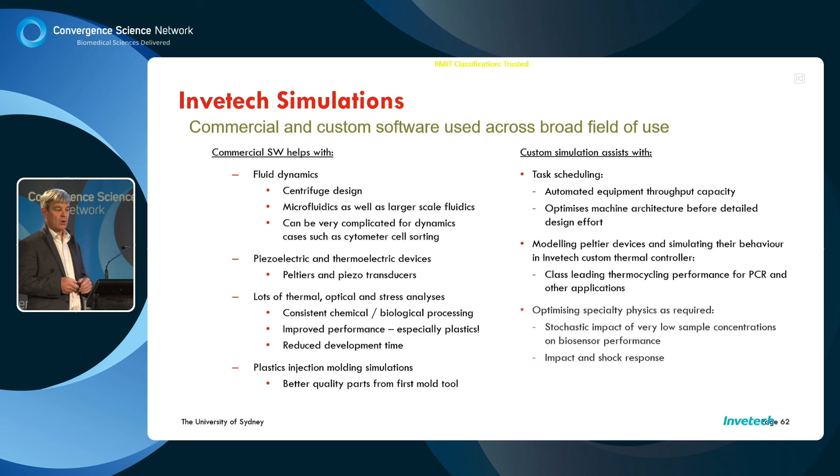Finally, on more unusual things, we'll go and do some custom simulations. One we've recently looked at is a biosensor, and what happens when you get extremely low levels of the molecule you're trying to chase - you end up with stochastic problems. We've started to develop understandings of those things, all to accelerate that process to the end.

Went through that pretty quick - I was short and sweet.

I do want to mention why I emphasize simulation a lot at Invetech and try to get people involved in it. That first fork I was talking about - I ran a very reduced model that used to run in 2 hours and 38 minutes on the first computer I was running it on, back in 1997. I gave it a burst yesterday on our box, which is 3 years old now, and it solved in 13 seconds. This is why simulation is going to continue to expand - the computing power, and what you can leverage from it, keeps growing. That's all, thank you.

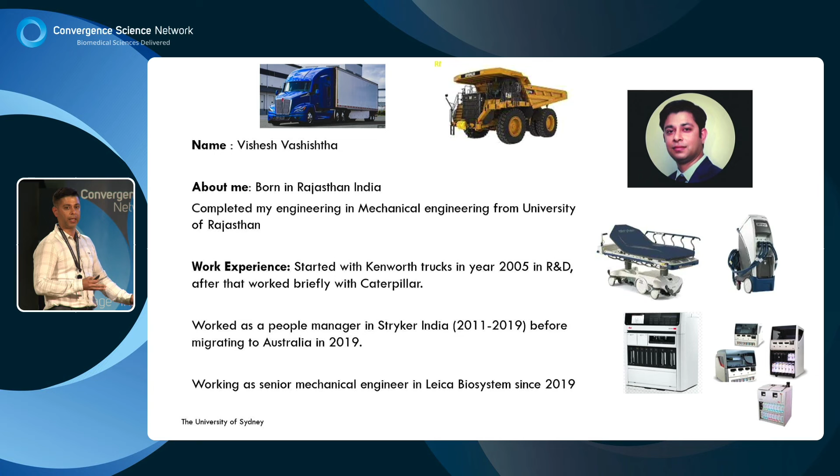Basically, I was involved in simulation from the beginning of my career in some way. Automotive was a bit boring. All we did was structural analysis and vibration, which is modal analysis in ANSYS. But coming to medical devices, it gives you a lot more opportunity to do different simulation, because your system generally consists of various interactions such as fluidics, thermal, mechanical structures, all of those components.

So a bit about Leica Biosystem. It's part of a bigger global Danaher group. Leica Biosystem is a pioneer in the field of cancer diagnostic equipment, spread across various locations around the world. We own end-to-end diagnostic, basically cancer diagnostic. In Melbourne, we design and manufacture some of the flagship products such as the Polaris Bond family. There are a couple of Bonds starting from Bond Max, the basic version, to the more advanced Bond Prime, which we have recently launched.

My role in Leica is basically as part of the product development group. I work on both new product development and sustaining the existing product, like whenever you have an obsolescence issue or a quality issue from market, or continuous cost improvement, which is VAVE in industry terms. All the projects we work on combine various disciplines such as mechanical, fluidics, thermal, electronics, all of them coming together. A project team typically ranges from a single person to a team of 10 to 15 engineers, depending upon the size and scope of the problem or project.

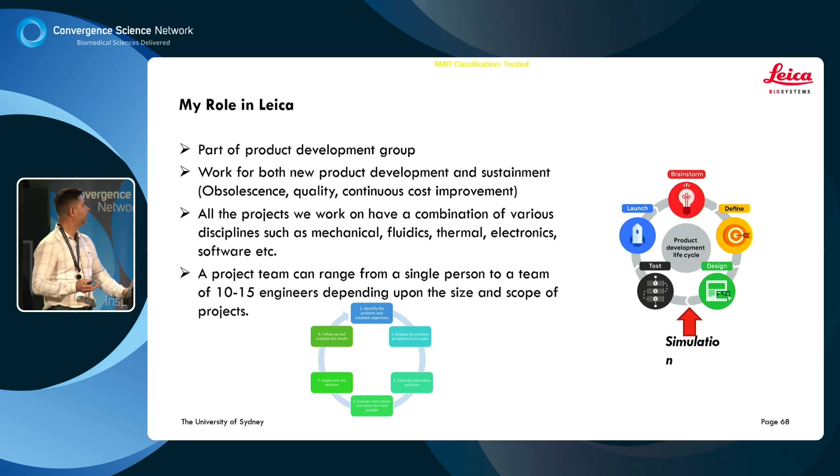There is another element where what we do is a problem solving approach. If you have a quality issue in one of your instruments or in any subsystem in general, then to understand the problem, we use simulation a lot. To understand and also generate various solutions, we use simulation a lot as well.

My work is not as deep and complex as some of the other presenters here, I'm quite young in my career still. So basically, two of the case studies I'm going to present here are thermal analysis of slide heaters and design optimization of pulley. I had some nice examples from my previous experience, but can't share them here because they are IP protected and I don't have the data anymore anyway.

So what we were trying to do - in our instrument we have slide heaters. Basically what you do is take tissue from a patient, put that tissue on a slide. That slide is heated by a slide heater and you apply various chemicals to get a sort of staining. That staining will further be diagnosed by an expert to tell whether it's cancer or not. So what I was trying to do was basically benchmark the temperature profile on a slide heater. We wanted to ensure that the temperature profile and cooling rate were under the threshold or whatever our requirements set for that instrument.

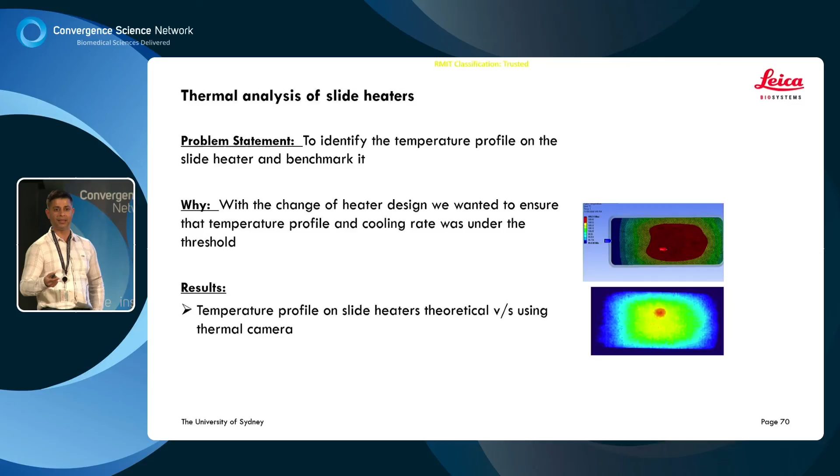So this is the theoretical picture - the thermal analysis we did in ANSYS, and then we validated it again using a thermal imaging camera. There's also some data from probes which is not shown here. We measure the temperature on different nodes in ANSYS and correlate it with the thermal camera by measuring various points, so that our model is verified. The advantage of doing that is whenever we change the design, we don't need to go and do that expensive testing again. Instead, we can evaluate different candidates and alternatives and do the simulation once we have this verified template.

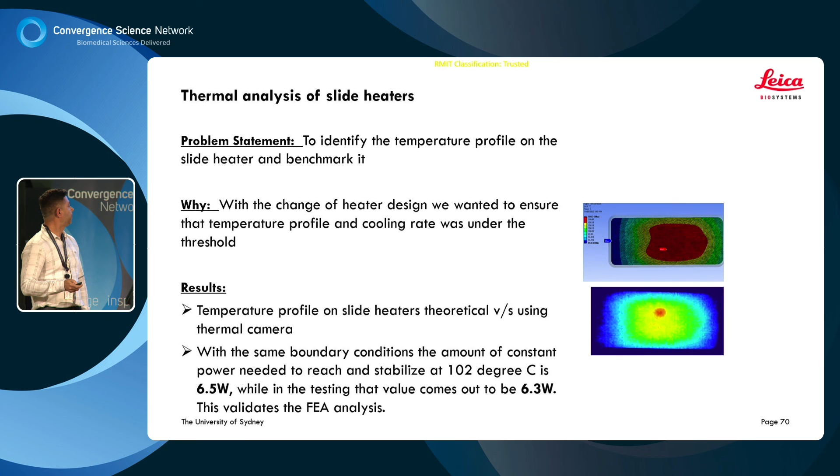This is again not so critical or complex example, but it's still something I wanted to share. It's very basic, and it will give you an idea of how in industry generally we don't use simulation in that deep or complex way. Sometimes it can be used for these simple things as well.

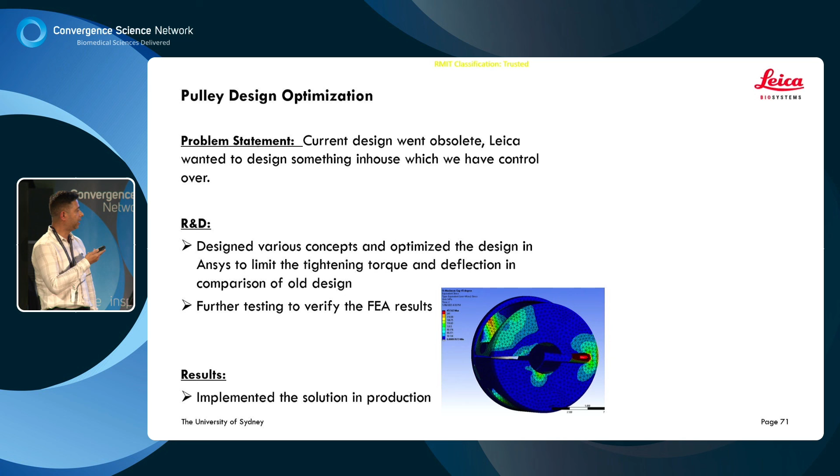We had a problem with a supplier where the current design of a pulley got obsolete, so we had to test and design different concepts of the pulleys. Before going into testing, we did a lot of simulation to understand the deflection we were getting on the pulley, and whether the tightening torque is the same as per the old design, because this pulley doesn't have that much thickness, so if you tighten them too much, they will break. So we did this simulation and finally optimized the design, found a good solution, and implemented that in production.

Again, I will say I'm also a big fan of simulation. If you want to cut down your product development cycle and also get efficient results, I think simulation should be used more and more. The problem I see is the garbage in, garbage out thing, which is very true.

Someone who doesn't have enough understanding of simulation has to first understand the physical system quite thoroughly. For example, if you're investigating something and don't understand your boundary conditions quite well, whatever you feed to the model is not going to give you a valid result. And if you are setting up a model to compare different options or designs, it's always better to validate it, because you don't know whether whatever you're feeding is giving you a practical, measurable, or comparable result as per the practical scenario.

In my organization, I'm setting up bi-weekly technical learning sessions where I hold these sessions with a couple of young engineers, going through case studies. We take a different topic every week: one week static structural analysis, then modal or vibration analysis, then thermal analysis. I'm also part of the group pushing management to get the CFD license. That's probably a bit hard because we don't have a strong business case as of now, but hopefully in future. And I hope to see simulation used more and more in industry.